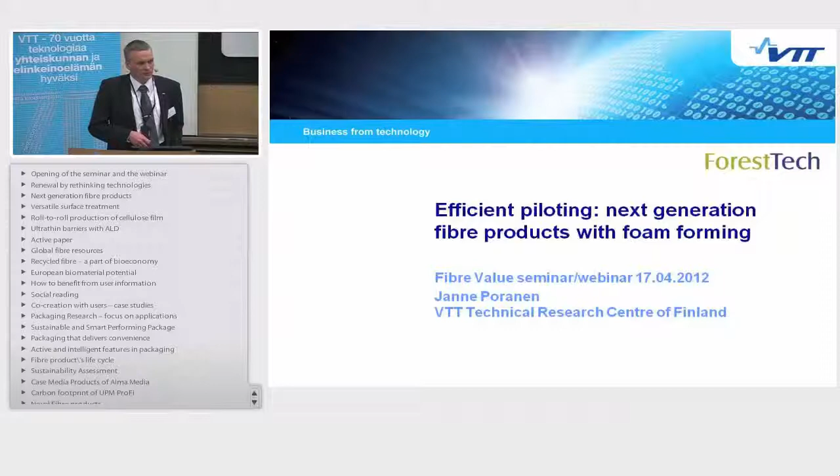As Pia said, my name is Janne Poranen, and I will give you a short talk this morning about the piloting facilities, what we have, and opportunities we have at VTT. There is also something about foam forming, which is on the title. Here is the outline: first I will introduce what our SUORA research environment is and what you can do with it. Then I have a couple of realistic cases we've worked on at SUORA scale. The last example, high filler content paper, comes from our TESTAA concept, which I'll briefly introduce. Finally, I will tell you about our latest development related to foam forming technology.

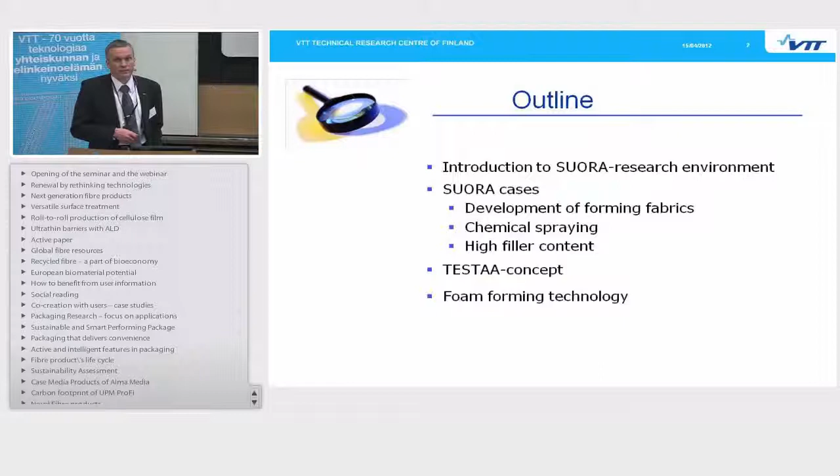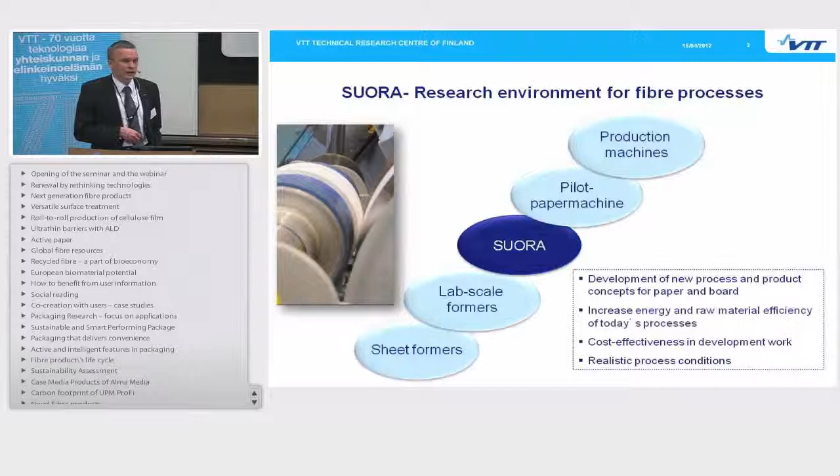SUORA is the research environment for fiber processes. I would say it's more like a research and innovation platform where you can do research related to different kinds of fiber processes. The scale of SUORA is somewhere between laboratory scale environments and industrial pilot paper or board machines. So it should be, and I would say it is, quite flexible, it is public, and you can do quite cost-effective research using SUORA. People often ask about the cost estimate for research at this scale, and the answer is always the same: it depends on the case. But the average is somewhere between 30,000 euros up to 50,000-60,000 euros per week, including all laboratory work and the research resources needed depending on the case.

Here are a couple of images of SUORA. It looks like an industrial scale pilot paper or board machine, but it is a little smaller and flexible. We can set up the concept at SUORA for the purposes needed. For example, the forming section can easily be used in one-wire form, Fourdrinier mode, or gap mode, and the short circulation system and process can be used in different ways. If there's a need to run your furnish only once through the whole process, that's possible. And if the amount of raw material is an issue, we can use quite small volumes even though the scale of the research environment is quite realistic. We also have quite big tank volumes - at the moment 3 tanks of 100 cubic meters and a couple of tanks of 15 cubic meters, so it's possible to do multi-component trials if needed.

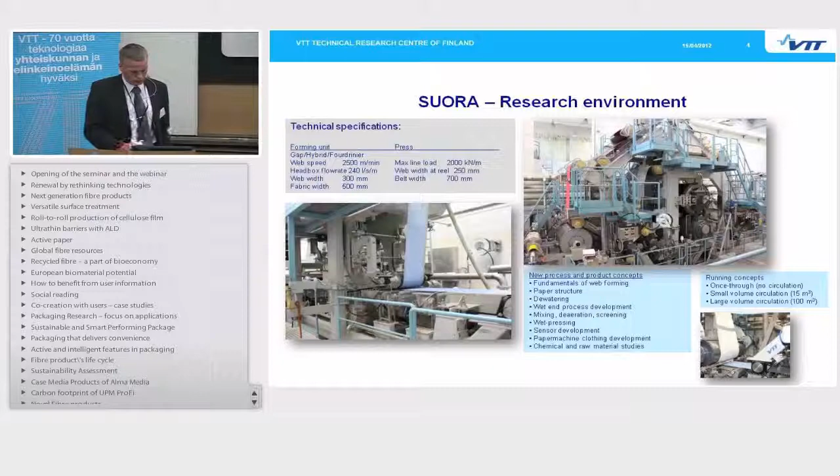The first example we've worked on relates to energy consumption in paper or board making, especially in the forming section. As we know, the forming section uses quite a lot of energy in the whole process. In this special case, done already in 2009 together with Tamfelt Corporation, we looked at what you can do just by using different kinds of forming fabrics. We were only playing with the design of the forming fabric, and we were able to measure the friction force between the vacuum box and the forming fabric, and also the total power needed in the forming section. It was quite a surprising result that only by using different forming fabrics, the total energy use in the forming section can be reduced by more than 10%.

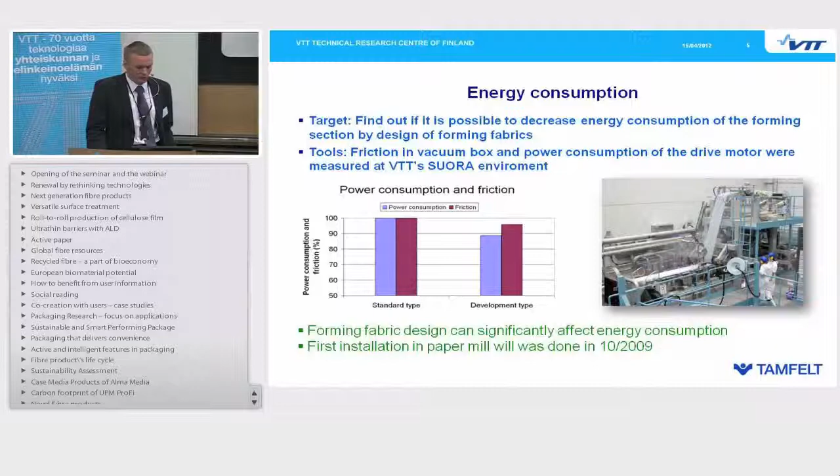If you then also start to play with other optimization issues, like the chemical concept, furnish concept, or the technology you're using, we believe there is still huge potential for saving energy in today's processes. Tamfelt already made the first installation in paper mills at the end of 2009.

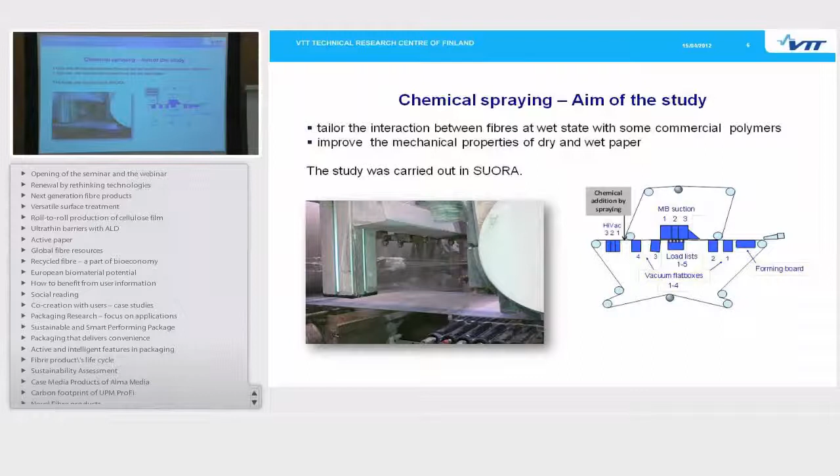The next case is related to the chemical spraying technique. Basically there is nothing new about spraying technology, but what we did - and this was done last year at VTT - we were spraying different kinds of polymers onto the wet web between the forming section and the press section. There's an idea behind this: when you spray chemicals onto the wet web surface, there are different phenomena and interactions in how the chemicals behave, and we looked at what kind of effects you can see using this technology with commercial polymers.

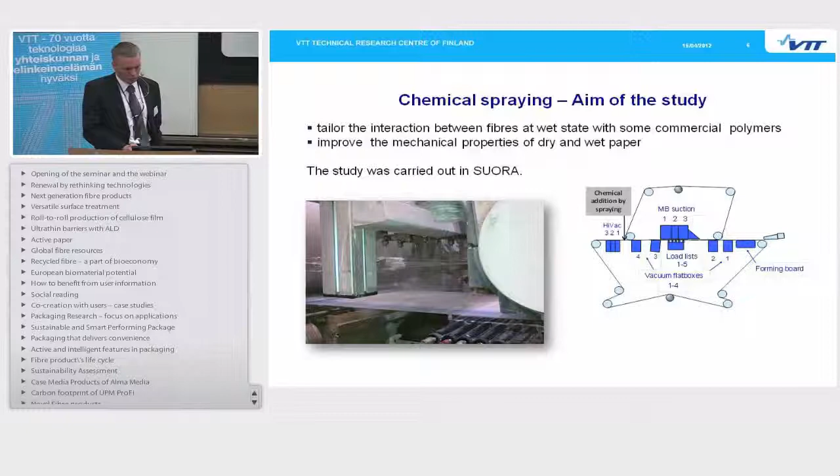The main finding was that there were no bad effects, for example, on the dryness of the wet web after the forming or press section, and no effects on the bulk of the final product. But we saw there is huge potential to increase the wet strength of the wet web by using these polymers with this spraying technology.

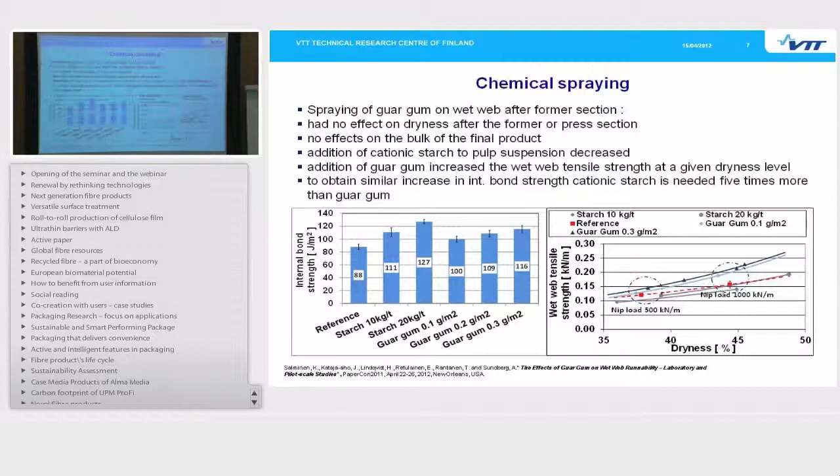There is going to be a presentation at the PaperCon conference next week, and Mr. Kristian Salminen and also Dr. Elias Retulainen, who is joining us today, are the experts on that field. So if you have further questions and would like to learn more, after next week there is going to be a public paper on that issue.

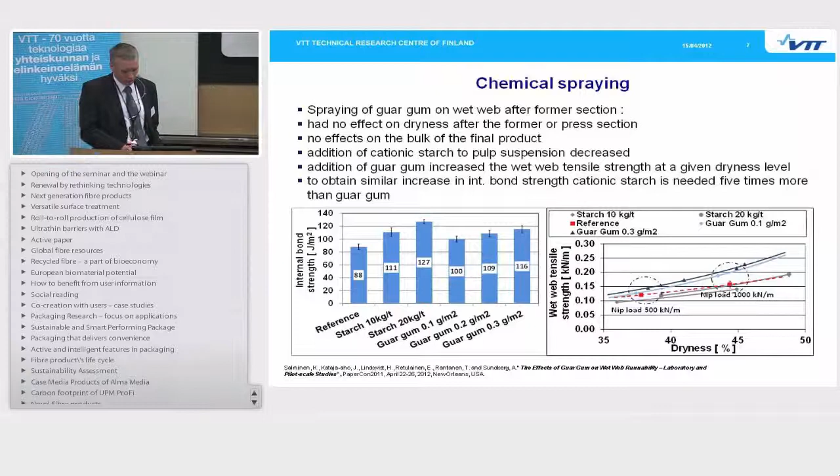The third example is done under the INT-Testaa or the Testaa concept. This INT comes from the word international. We had this kind of TESTA concept already three years back, but then it was more or less a Finnish-based concept. The main idea is that we would like to get small companies, large companies, and research organizations to work together, because we believe there are a lot of new innovations around, and if we can put those together on some public platform, there might be a big opportunity for large companies, research organizations, and especially small and medium-sized enterprises.

We had this kind of project ongoing, and it was publicly funded, so it is totally public. The only cost for the SMEs was that they had to use their own time to join and work together with us and with other SMEs and big companies.

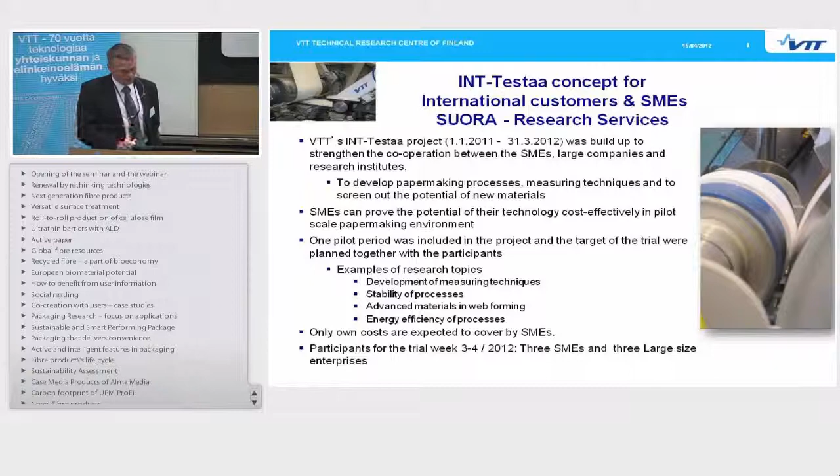At the moment we are planning the continuation for this Testaa concept. If anyone from the companies is interested and would like to come into VTT and work together with us and other companies, you can contact me or someone else from VTT.

Here is quite a new result which was done in an INT-Testaa trial week. The goal was to look at how much we can increase the filler content on SC paper. Omya was very active during that trial week, and Mr. Timi Hyppänen is here today too, so you can ask him if you need any further information about that case.

What we did was try to increase the filler content from 30% up to 50%, and it was quite successful. We were able to run the machine stably, with no runnability issues. Even though the filler content was increased, the retention was still at a very good level, and actually a little bit increased.

There is one example in the bottom right corner where you can see that when the filler content is increased, the ISO brightness is also increased on the final product, which tells us there is more filler in the paper, and the retention is quite good.

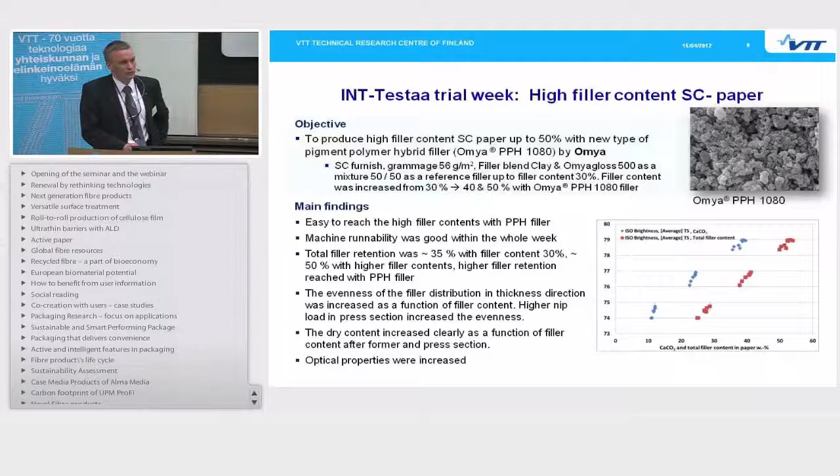So we can all understand that if you can actually do this in real life, there is a huge potential in many processes we are using today.

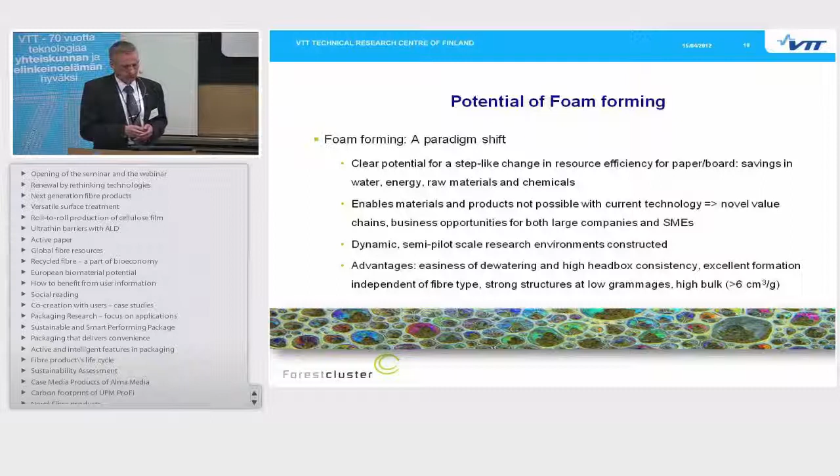Now I have three minutes left, and as the title mentioned, I'll try to tell you something about foam forming. We have been working on the foam forming technology in the forest cluster programs for a couple of years now. We have seen there is huge potential in that technology, and maybe now is the time that the forest industry is looking for something totally new, with step-like changes in the processes and how you can get real benefit out of your production.

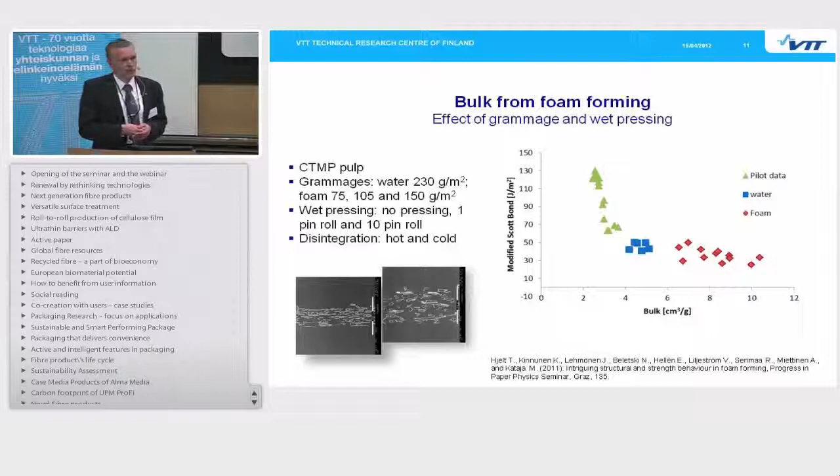Here is one example related to bulk, and how you can play with the bulk when using foam forming technology. You can see that you can increase bulk quite a bit with this technology, and it's not possible to achieve these numbers with water-laid processes. Of course, there are questions about how you can keep the strength at the same time, but we believe, and there are already some results showing, that it's also possible.

What we are doing at the moment is we started a new, quite big, €2 million project to upscale this foam forming technology into the SUORA scale. It started at the beginning of this year and will continue until the end of 2013. It is a publicly funded project with strong industrial involvement already, and our target is very high, because our aim is that already this year we are able to run our SUORA environment using foam forming technology.